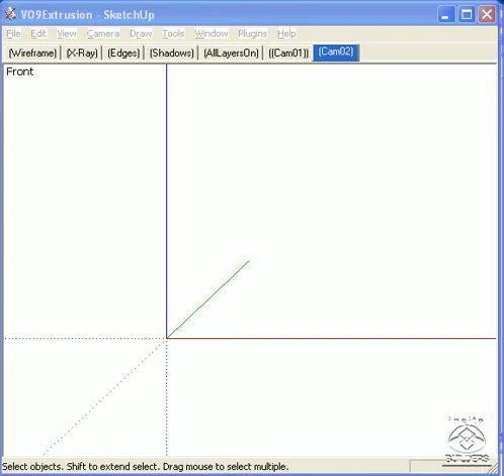This shorty is a quick and simple video on how to quickly extrude a 3D model from a 2D drawing. The technique would work for a floor plan, elevation, aerial photograph, or even a survey map. We start by importing a scanned image into SketchUp and scaling it.

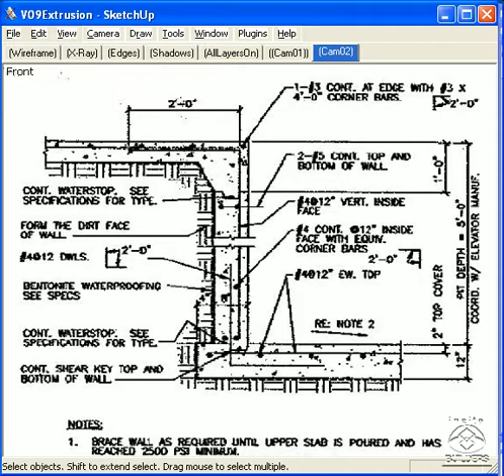Let's take a look at the detail itself. This is an elevator pit for the building. This is the floor of the foundation, one of the walls of the elevator pit, the floor of the pit. What we're going to do is start by tracing out this floor.

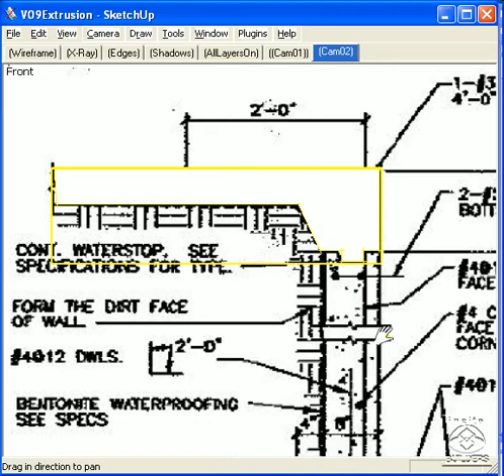As soon as the floor is traced, I select it, then immediately group it and name it as the floor of the foundation. Now we do the wall. Select the wall and group it. Immediately name it.

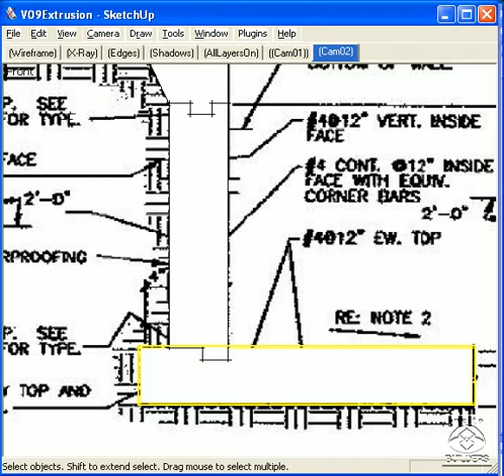And then finally the floor. Group it and name it. Now because these objects are opaque, I'm going to make them transparent by using a transparent material.

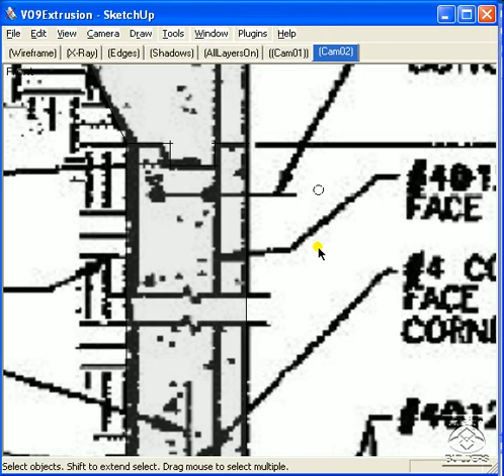I can now zoom in and make a rebar. I select this circle, immediately make it a component, and label it rebar D. I can now move into 3D and extrude that rebar. I'm going to pull the rebar out 24 inches.

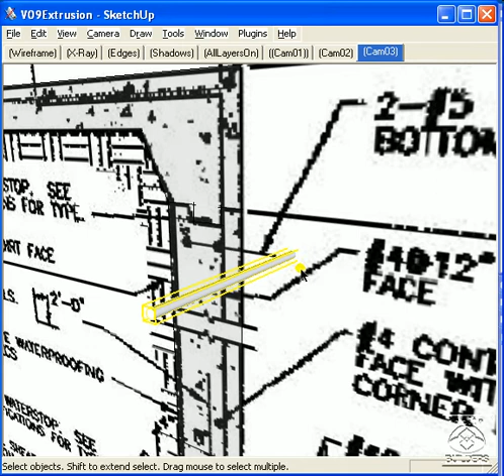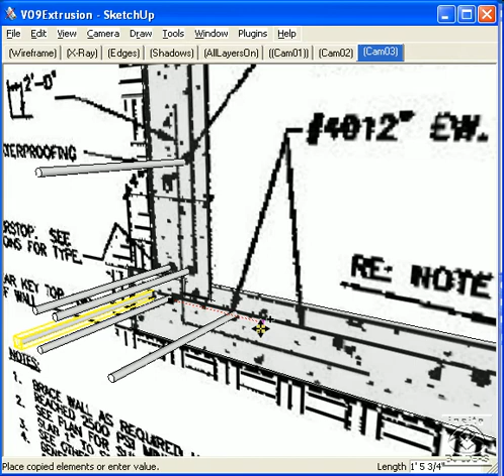Once extruded, I'm going to place the rebar directly over the 2D drawing in the positions indicated. The concrete will be extruded in exactly the same way.

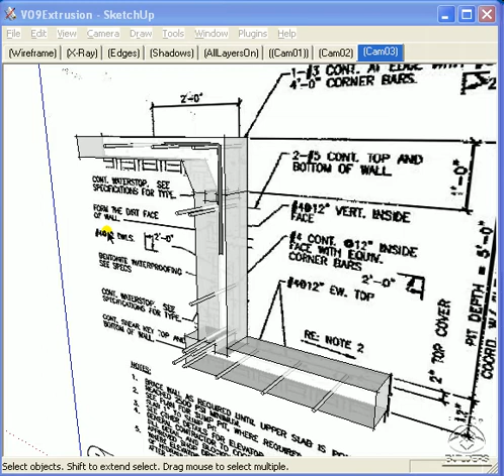It's now a matter of adding these dowels or these bent right rebar at 12 inches on center. First we add the top one, select it, and move it outbound 12 inches. And we could duplicate that several times. Do the same for the bottom.

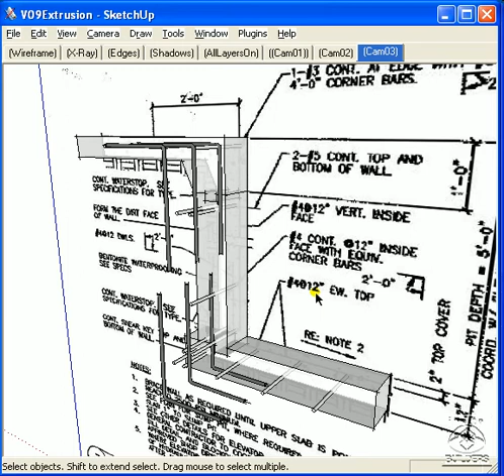And once those are in place, we can put these number 4s in at 12 inches on center. We can take all of the perpendicular rebar and scale it out. We can also scale the walls.

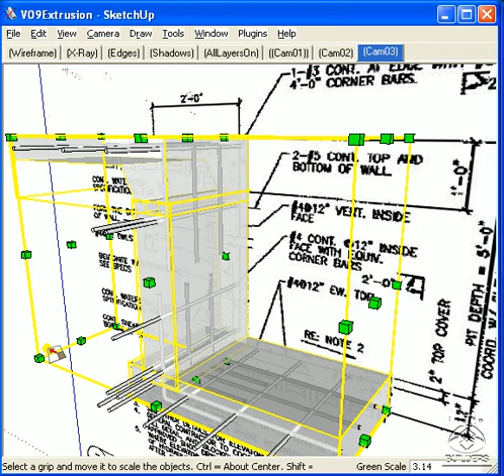I now use the scale tool to create some differential between these wall structures. We'd also want to change the colors just to make them more opaque and realistic. Move this around, and then I can take the entire detail and pull it away from the 2D.

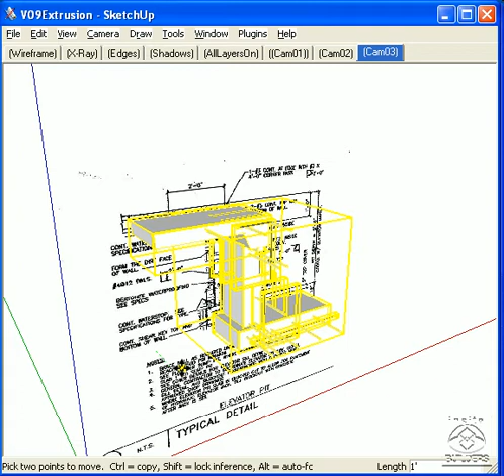And this is how that detail is represented in the book. Note that I combined a sump detail in the same SketchUp file.